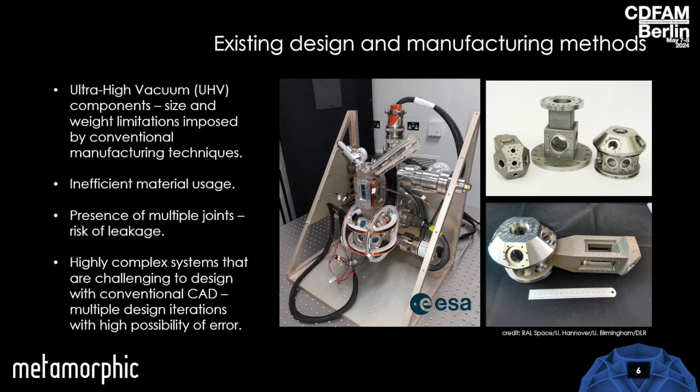So an important part of every multidisciplinary project is the knowledge exchange that happens at the start. This is when requirements are gathered and when the team tries to identify areas that can benefit from design for AM. So within a short period of time, with the help of our partners, we had to really build an understanding of cold atom interferometry and also magneto-optical trapping. That basically means using a combination of lasers and magnetic fields that have specific shapes and gradients to trap and slow down atoms so that these can be observed.

And also we went through the typical process that they follow when they design these complex systems and how they assemble them as well. And at the same time, we demonstrated examples of previous work. Also, we went through some of the most common techniques used in computational design, like field-driven design, form finding, etc., to get them thinking really about the possibilities. And also we covered aspects of metal AM, including considerations for post-processing and machining.

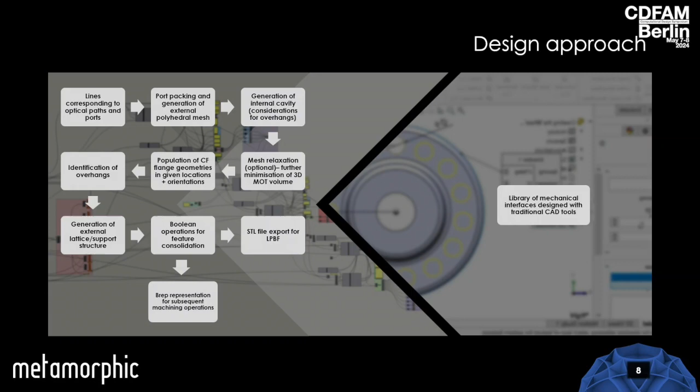And this is when things, I think, get really interesting for us. So in this project, I'll go into the technical details a bit. So we followed a hybrid approach. We have a computational design script developed in Grasshopper for Rhino, and this script generates the chambers. It has access to a library of parts, mechanical interfaces, ports that have been designed using traditional CAD tools.

So the user starts from defining, as you can see on the top left, the optical paths and the corresponding port diameters. And the script calculates the optimal packing density of these ports, so the best arrangement of these ports so that they don't intersect with each other, while at the same time ensuring that we have the minimum volume of the resulting chamber.

So this is done through solving intersection events between cylinders whose diameters correspond to the external diameters of the ports. And then, based on these calculations, the Boolean union of these cylinders is trimmed. And the resulting geometry, the mesh, can be reparametrized, and through constrained mesh relaxation, you can get a nice kind of external surface.

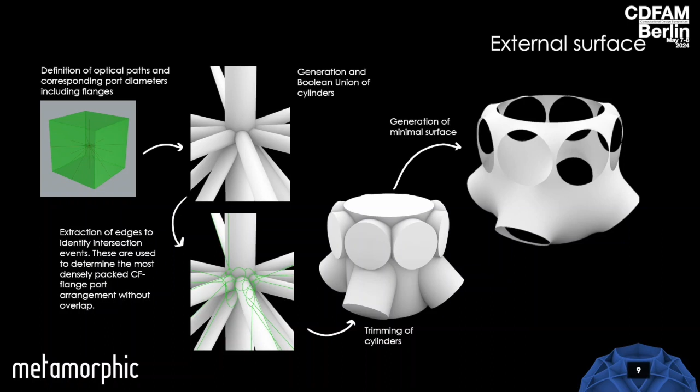A similar process we follow for the internal surface. In this case, however, the cylinders correspond to the actual ports, the diameters of the ports. And this can also be combined with a minimal surface to minimize the surface area of the internal cavity.

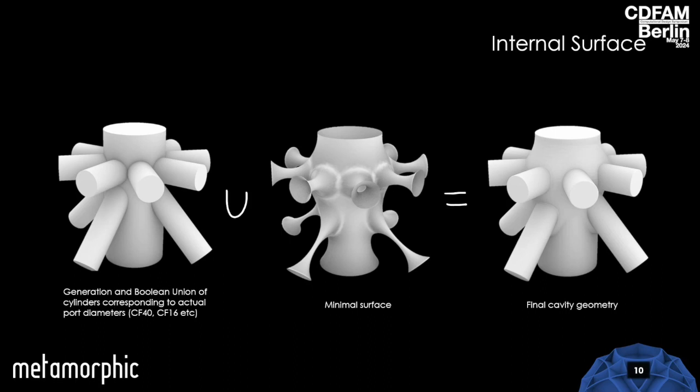The first step was really to build a robust algorithm that allowed the team to explore hundreds of design variations with very minimal input. So the algorithm generates a nice watertight geometry of an ultra-high vacuum chamber, and also gives us the minimum volume for any given combination of ports.

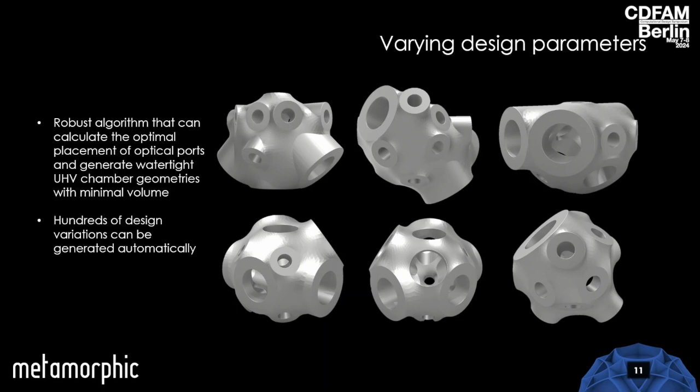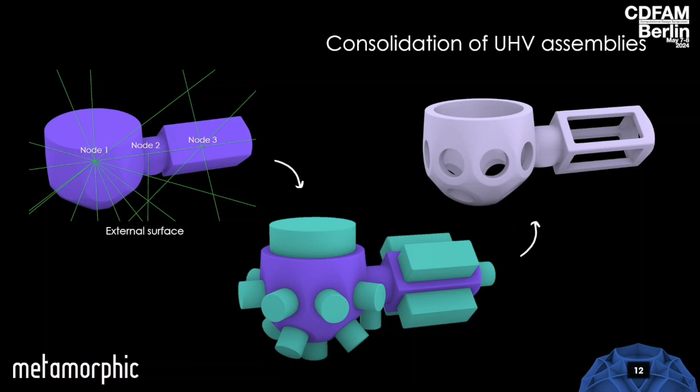And once you have that, you can actually have an assembly of chambers, here defined as nodes, as you can see on the top left. The user can specify the relative orientation and position of these chambers in relation to each other. And following the same approach, you can get a nice consolidated assembly that can be used for the operations that follow in this workflow. So at the same time, we lightweighted a lot of these interfaces.

So you can see here, I don't know if you can see my cursor. No, you can't.

A lot of these ports eventually could be replaced with brazed windows, and this could also result in further reductions in weight. However, scientists want to be able to assemble and disassemble the system. They want to be able to mount different peripherals, different components, detectors and things onto these ports. So we stuck to this kind of approach.

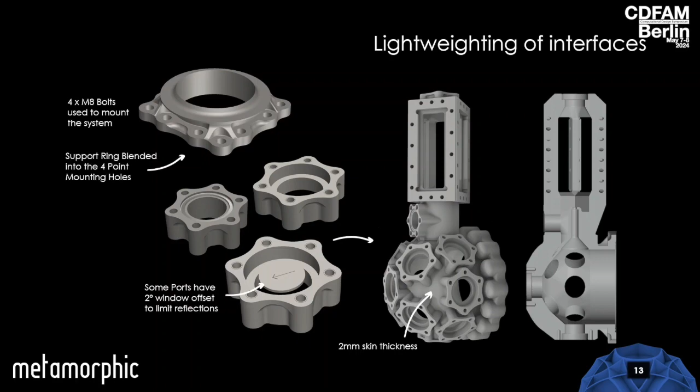So after the individual sections of the chamber have been merged and smoothed, the mesh that corresponds to the external surface is reparametrized, and the nodes of this mesh are then used for generating a network of lines, which is then filtered. The user defines the printing direction, and any lines that fall between 0 and 45 degrees are removed.

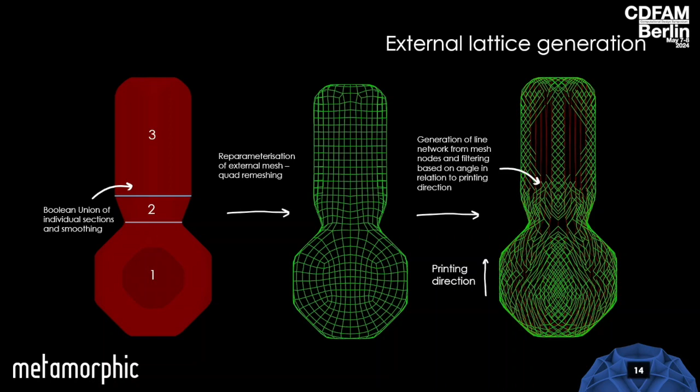And from there, the script also identifies all the overhanging features. So we have all the ports basically populated, without the features that are machined. And by defining again the printing direction, the script identifies all the overhanging features and draws members between these features and the ribs. As you can see, these are the lines from the original network extruded inwards. So it draws members between these overhanging features and the closest ribs.

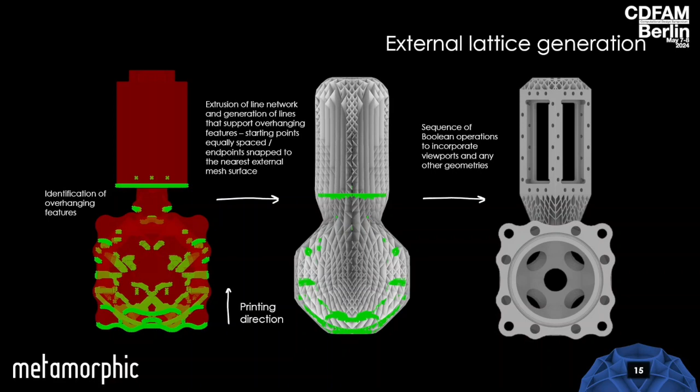And the user can specify the thickness of these members and also the thickness of the ribs, which can also be varied locally. And through a series of Boolean operations, you get a nice UHV chamber geometry. But we're not done yet. These cold atom experiments, to be able to work, require magnetic fields with specific shapes and gradients. This is essentially to be able to trap the atoms effectively.

Nottingham Uni went through a series of optimizations, and they managed to determine the optimal size and location of these coils in relation to the atom cloud in the center of the chamber, and also the number of turns. So we had to basically trim the lattice so that we can fit these coils. And by bringing them as close as possible to the chamber, the nice thing is that you can reduce power consumption in these systems.

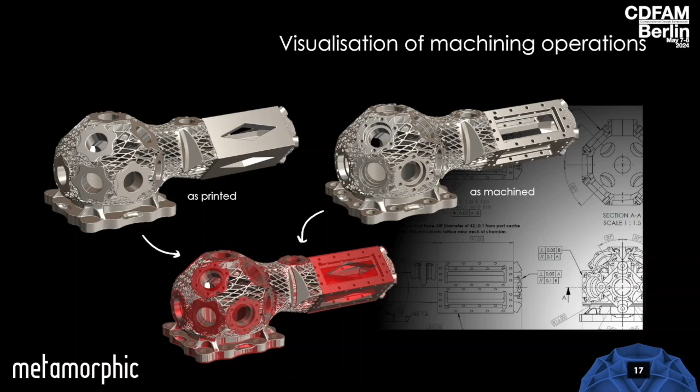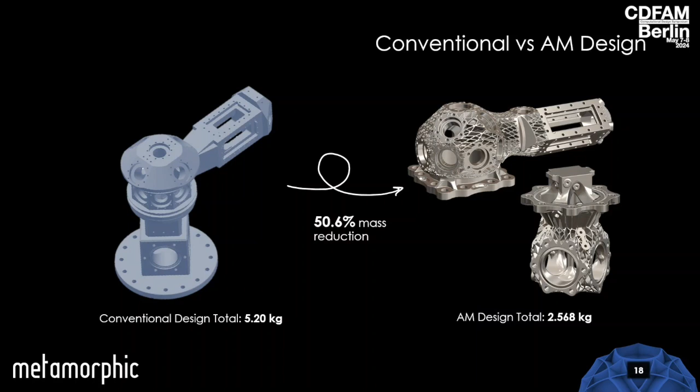So the verdict. Compared to the original system designed for the European Space Agency, we achieved approximately 50% mass reduction, and, in our opinion, a design that better suits the next generation of ultra-high vacuum, portable quantum systems. The chambers were printed in titanium 6-4 using laser powder bed fusion. You can imagine the machining was not easy. The chamber had, I think, almost 120 bolt holes.

The print bureau, which is a well-established bureau in the UK with more than 30 years of experience, said that this is one of the most complicated parts they've ever had to manufacture. They had to plan the sequence of machining operations very carefully. And the chamber is currently being tested at RAL Space.

So early results suggest a helium leak rate in the range of 10 to the minus 10 millibar liters per second, which is in line with most ultra-high vacuum components. However, more testing needs to be done in the months that follow. The system needs to be baked so that any trapped atoms are removed, and then it needs to be pumped down, which can take a number of weeks to reach a safe conclusion about its performance.

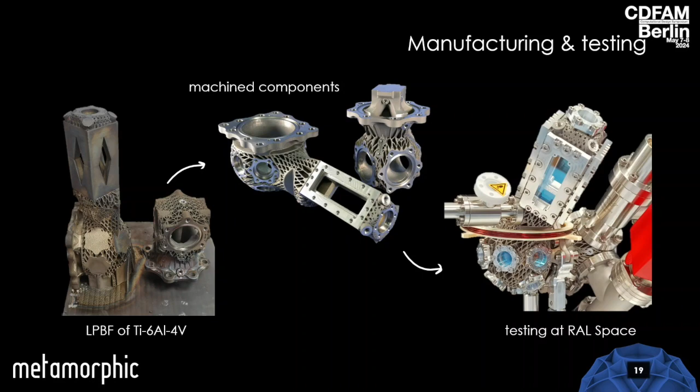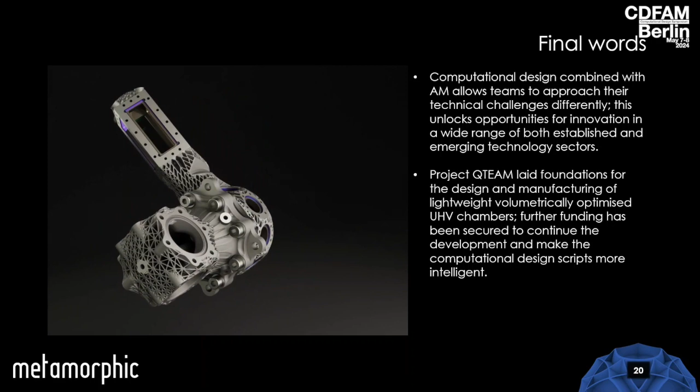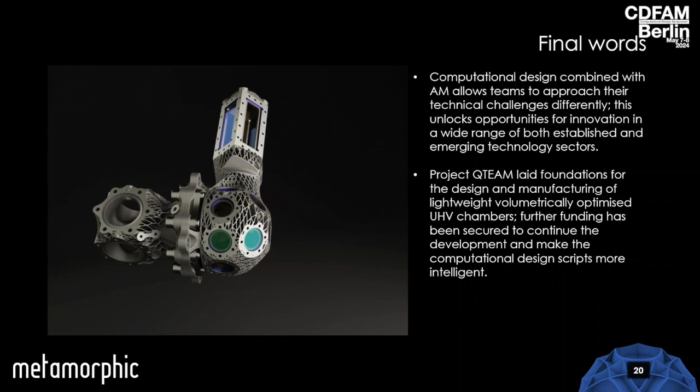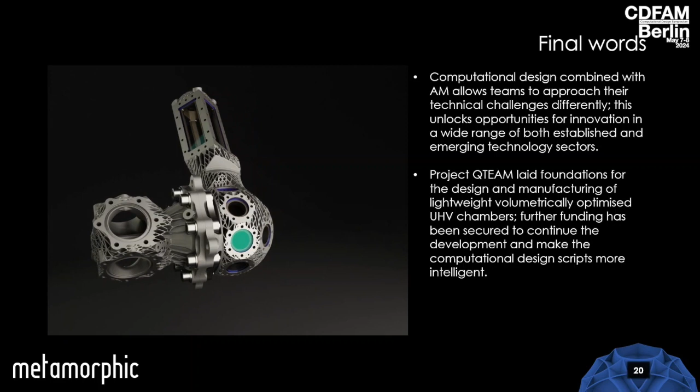So I think QTEAM demonstrates very effectively how computational design combined with additive manufacturing can really help teams approach technical challenges differently, and this unlocks opportunities for innovation in a whole range of both established and emerging technology sectors. Project QTEAM was just the start. It laid the foundations for the design and manufacturing of lightweight, volumetrically optimized, ultra-high vacuum chambers. The project finished a few months ago. Since then, we've managed to secure more funding to continue the development and also make our computational design scripts more intelligent.

And finally, we applied to the TCT awards with this design under the aerospace and defense category. And I'm delighted to share that we've been shortlisted alongside Boeing, Airbus, and Markforged.

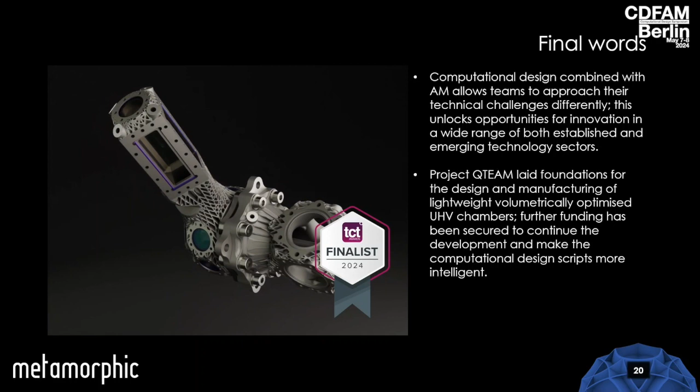Okay, I'm going to give you the CDFAM award. Here. This is the CDFAM award for best design. Thank you. Thank you. All right. So this, oh yeah.